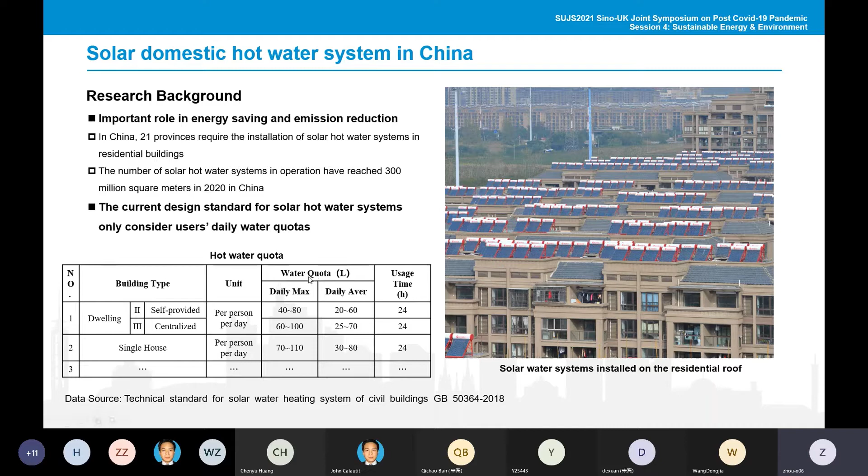In China, 21 provinces require the installation of solar hot water system in residential buildings, and the number of solar hot water systems in operation have reached 300 million square meters in 2020. So currently, for the solar hot water system design, as shown in the table, only the daily water consumption is considered.

However, in fact, the daily hot water consumption behavior of users has different distribution over time, and the energy of the solar hot water system also changes with the sun throughout the day. Therefore, the distribution of water usage for occupants may have an impact on the solar hot water system. Previously, studies have found that occupant behavior has a huge influence on the building energy consumption, while the impact of users' water usage on solar hot water system is rarely discussed.

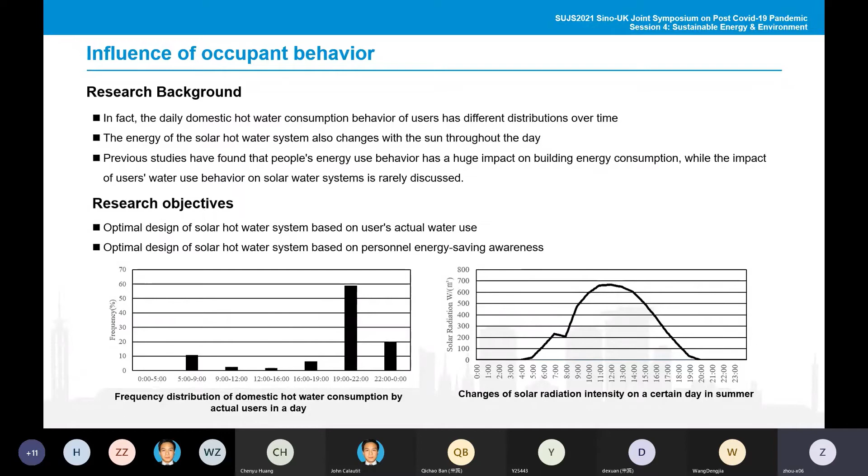This model interacts with the solar hot water system model through parameters such as water consumption and hot water temperature. Based on this model, the optimal design of solar hot water system to match the user's actual water usage and to match their occupants' awareness of energy saving were studied.

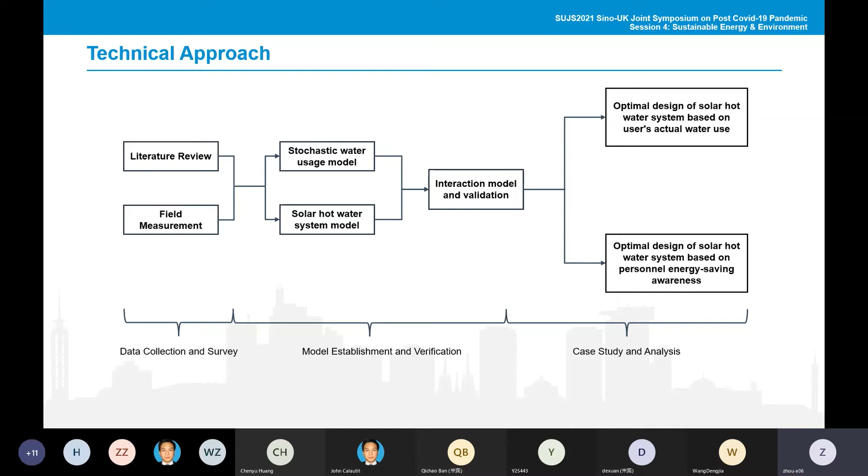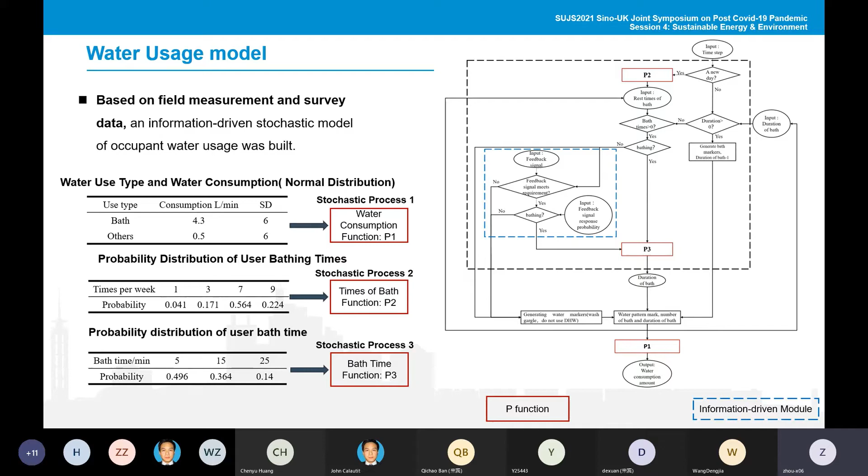Meanwhile, an information-driven module was added into the model, as presented by the blue dashed box. This module is used to reflect the occupant's response to the signal provided by the system. So the users will adjust their water usage time or amount according to the information provided by the solar hot water system. Then a centralized storage and terminal gas reheating system was taken as the studied solar hot water system.

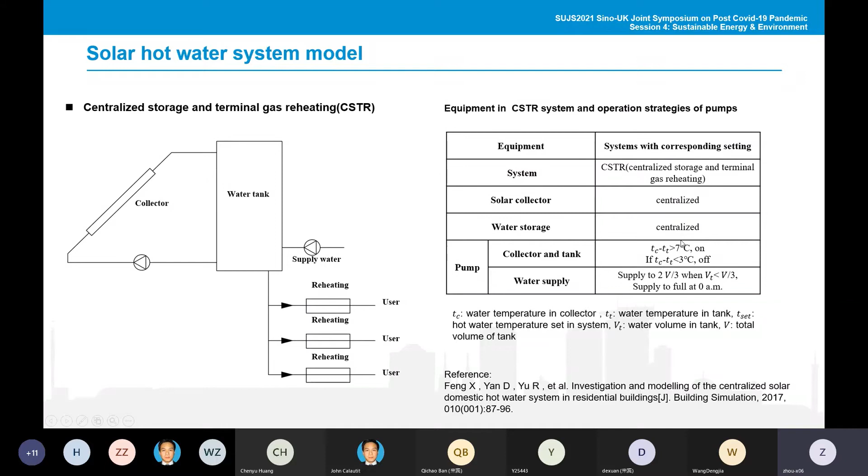The equipment selection of the system and the control logic of the pumps were listed in the table. The specific model calculation method is detailed in this reference. And the 2 models are interacted through water consumption and hot water temperature in the centralized water tank.

At each time step, the water usage model will output a total water consumption amount to the solar hot water system module. Meanwhile, the solar hot water system can offer temperature information to the users. Then users can choose whether to feedback according to the temperature signal.

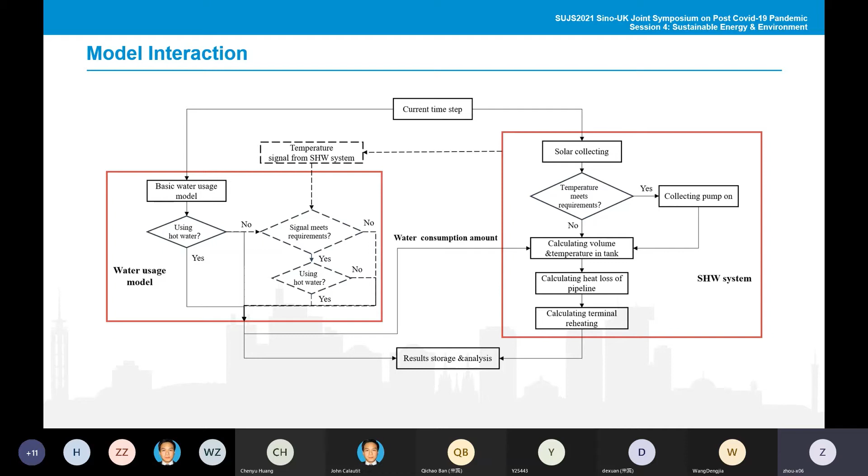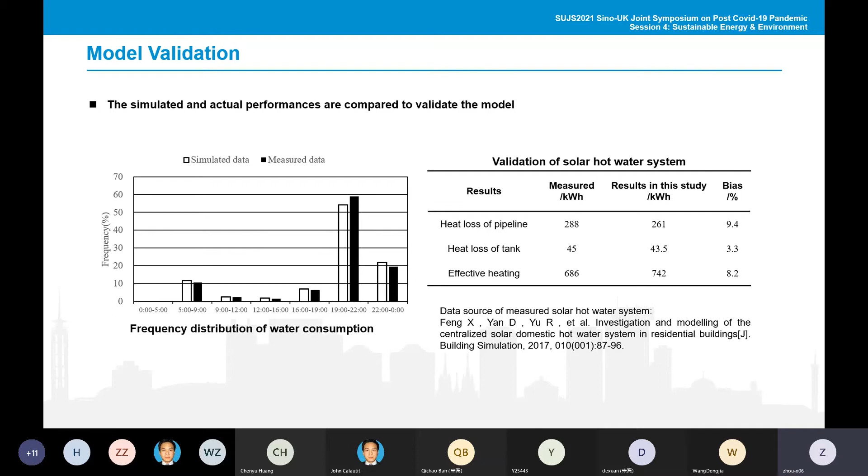The comparison of effective heating, heat loss by pipes and the tank between simulated and measurement is shown in the table, and the differences are within 10%. So it is feasible to use the model to analyze the performance of the system in the next step.

In case 2, the distribution of actual water usage was taken into consideration. Namely, users use more water at night, so the heat storage should be increased before the peak of night water use, and the impact of water replenishment should be reduced.

So the water tank volume was reduced, and the water pump would keep the amount of water in the tank full during the day to store as much solar energy as possible.

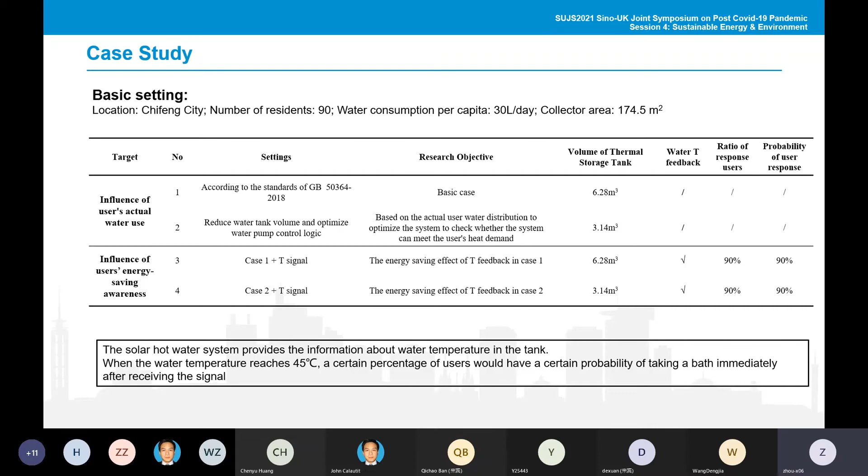Then case 3 and case 4 were designed to check the influence of water temperature feedback on the system consumption. In the 2 cases, the solar hot water system provides the information about the water temperature in the tank. And when the water temperature reaches 45 centigrade, a certain percentage of users will respond to the temperature signal, and there is a certain probability that they will take a bath immediately after receiving the signal.

So based on the actual water usage profile, we made improvements to the solar hot water system design, including reducing the water tank and changing the control logic of the water pump. From the comparison, we can find case 2 can reach a similar solar energy utilization while saving the investment cost.

A typical day was chosen to take a close look at the operation of both systems. We can find that in case 2, before the peak of water consumption at night, the water tank stores enough hot water for night use, so its supplementary heat at night is even smaller than case 1.

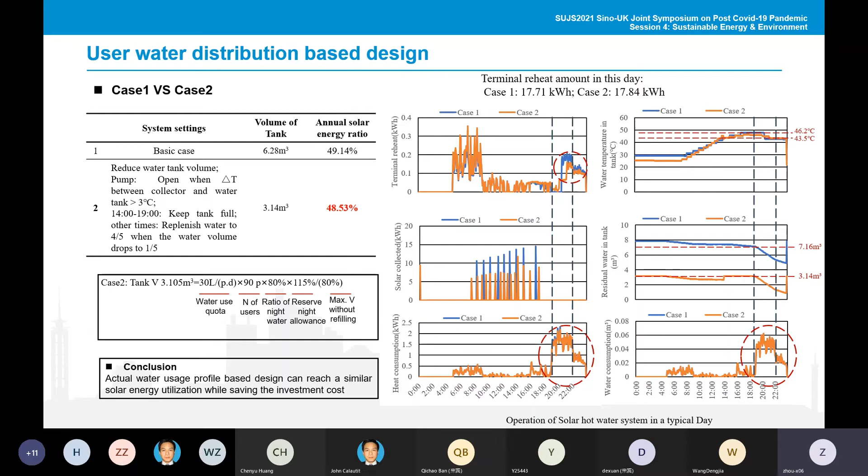Then we compared case 1 and case 3 to figure out whether the water tank temperature signal can produce energy saving effects from the standard designed solar hot water system. From the annual solar energy usage ratio, it can be concluded that the improvement is very limited. So we also take a typical day to figure out what happened.

According to the water volume curve of the water tank and the water temperature change profile, it can be found that due to the huge capacity of the water tank, the hot water is sufficient for users at any time of the day. That is to say, the amount of hot water supply in this typical day is much greater than the demand at any time. Therefore, the water usage curve has no obvious effect on the operation of the solar hot water system. So the temperature signal feedback cannot work in this system.

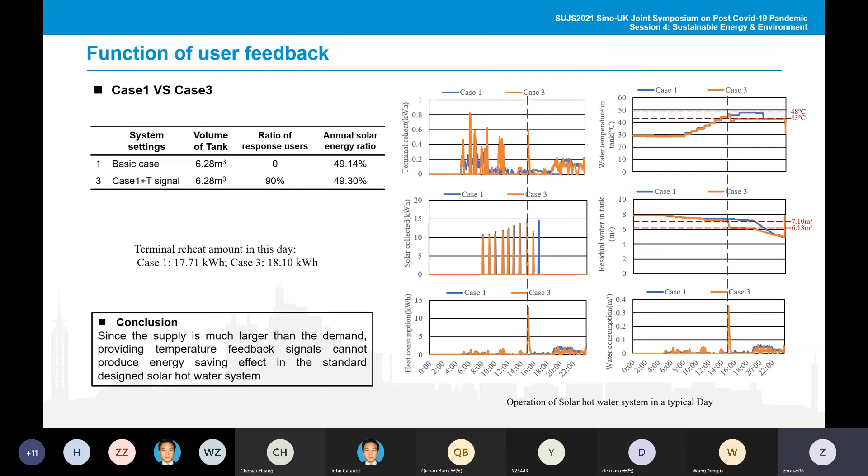Then for the improved system design, we found that the involvement of the user's feedback also cannot work. The reason for this is that the offer of temperature signal leads to a water usage peak around 2 o'clock in the afternoon. However, due to the limited water tank capacity, the solar energy cannot cover all the demand. Therefore, much terminal reheat was consumed during this time. Namely, the mismatch of supply and demand causes signal feedback to not bring energy saving effects.

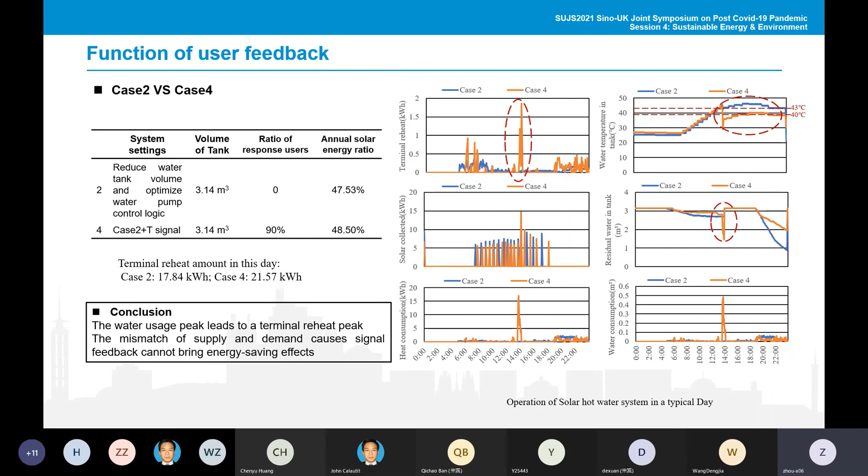Based on case 4, we further studied the impact of users' energy saving awareness on the use of solar energy. This figure describes how the solar energy usage ratio in a typical day varies with the proportion of responding users and the probability of users' response.

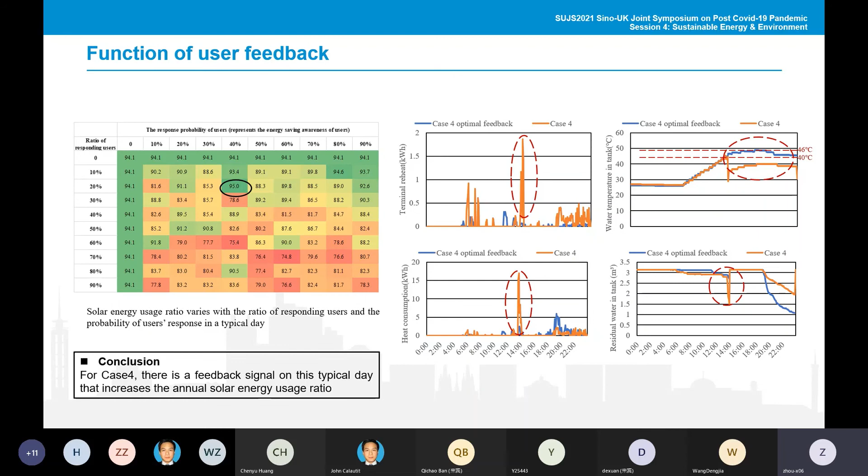It is interesting to find that in this typical day, under a certain feedback intensity, the supply and demand of the solar energy system can be better matched, thereby retrieving a higher solar energy utilization. Of course, this matching relationship will be influenced by the system design and the weather condition, which is one of our further research topics.

Well, then I want to make a summary about this presentation. In this study, an information-driven stochastic model of occupant water usage was proposed, which is integrated with the solar hot water system to reflect the influence of water usage profile and users' response. Based on actual water usage profile, the water tank capacity can be reduced, which can save investment and achieve the similar operating effect as the standard water tank design.

Due to the surplus system capacity for the standard designed solar hot water system, providing feedback signals to users cannot achieve system energy saving. Whether the solar hot water system can exert its energy saving potential is affected by the coupling of water use behavior and the system design. On one hand, it should stimulate the energy saving behavior of occupants. On the other hand, the system should be able to match the energy saving awareness.